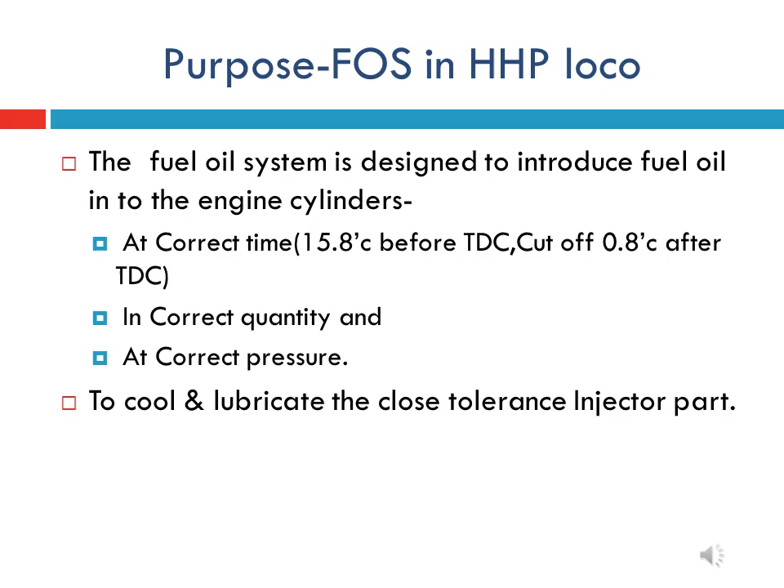Major components of fuel oil system. Fuel oil system of HHP locomotive consists of fuel tank, fuel suction strainer, fuel booster pump, primary fuel oil filter, engine mounted fuel oil filter or secondary fuel oil filter, fuel supply return manifold, and mechanical unit injectors. So let us discuss briefly on these major components one by one in different slides.

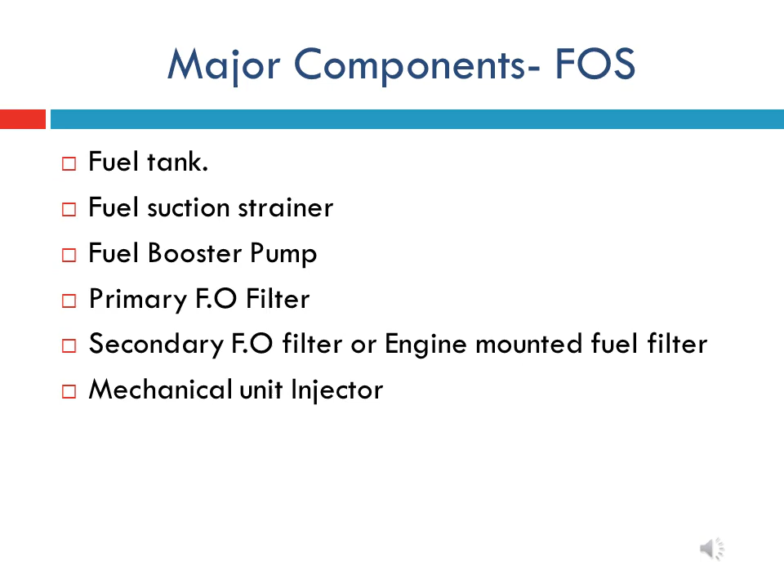Fuel tank of HHP locomotive. In HHP locomotive, the fuel tank is detachable and attached to loco underframe. There are so many varieties of HHP or GM locomotive and each having different fuel tank capacity. Like WDG4 and WDG4D having 6000 liter fuel tank capacity, while passenger locomotive WDP4B and WDP4D having 5000 liter fuel tank capacity.

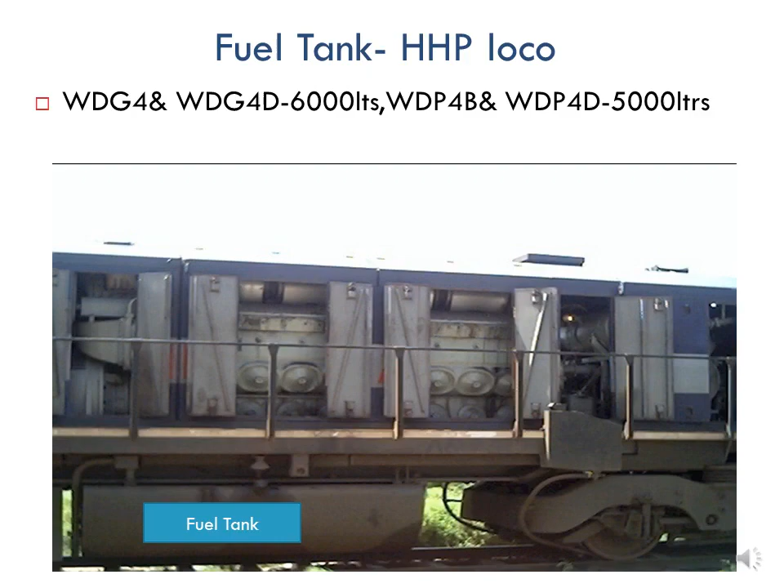Fuel suction strainer. Suction strainer is connected in the system before fuel booster pump and between fuel tank and fuel booster pump. This filters the fuel oil and protects the pump against damage from foreign material. It is usually cleaned in monthly schedule and renewed after 180 days. Rubber O-ring is the important part and normally it is to be replaced while replacing the strainer element after 180 days.

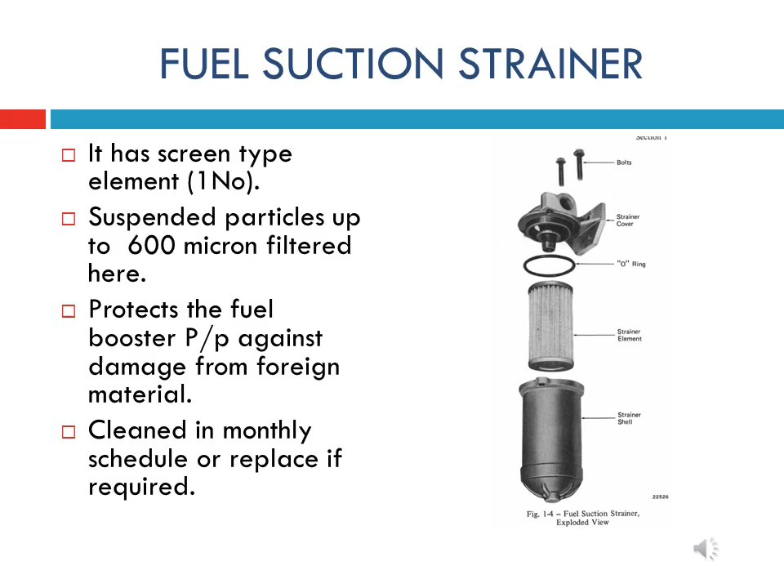Fuel booster pump. Fuel booster pump of HHP locomotive is a gear type positive displacement pump and driven by an electrical AC motor. AC motor gets power from loco battery during system priming, and after starting of engine it gets power from the auxiliary generator. The discharge capacity of pump is 24.6 liter per minute and it is located near front end of the main engine on right side.

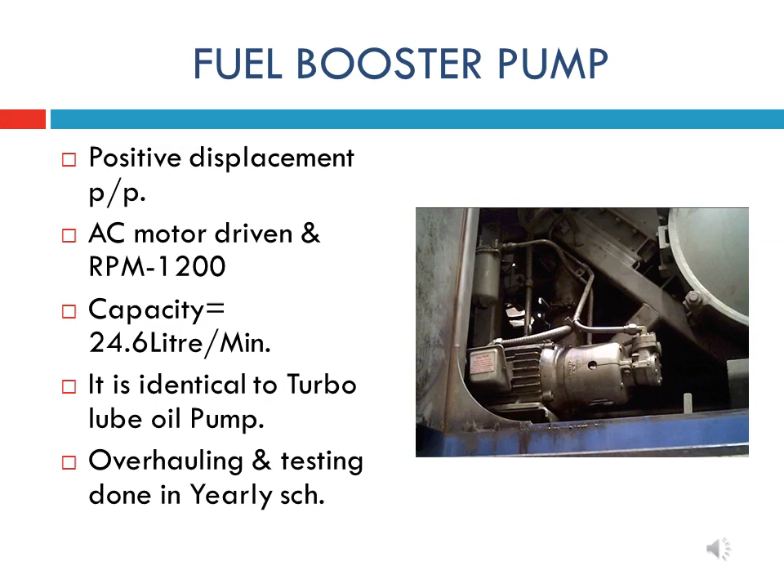Fuel booster pump relocated. Through this slide, I want to say that in most of HHP locomotive, the fuel booster pump is shifted to under gear in between fuel tank and bogies. It has been done by DLW under modification because of frequent failure of inverter of motor. Further, DLW clarified that there was an issue of net positive suction head of pump with motor, so modification has been made.

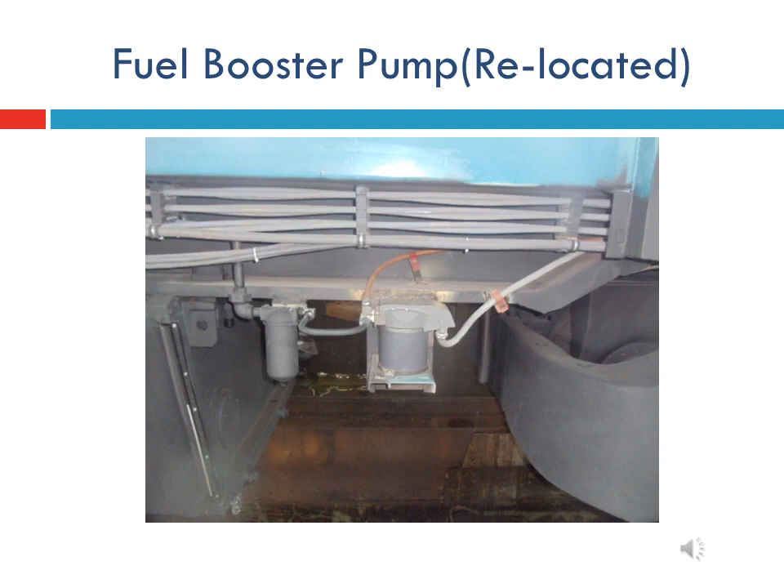Primary fuel oil filter. Primary fuel oil filter is connected in the system between fuel booster pump and secondary filter. It is mounted on accessories rack. It consists of two paper type filter assembly and renewed after every 90 days or on condition basis. Primary fuel oil filter is equipped with bypass valve and gauge set at 30 psi differential pressure. As the filter element becomes plugged, the indicator will show red zone. At this point, the bypass valve will begin to open, allowing the fuel to bypass the primary filter.

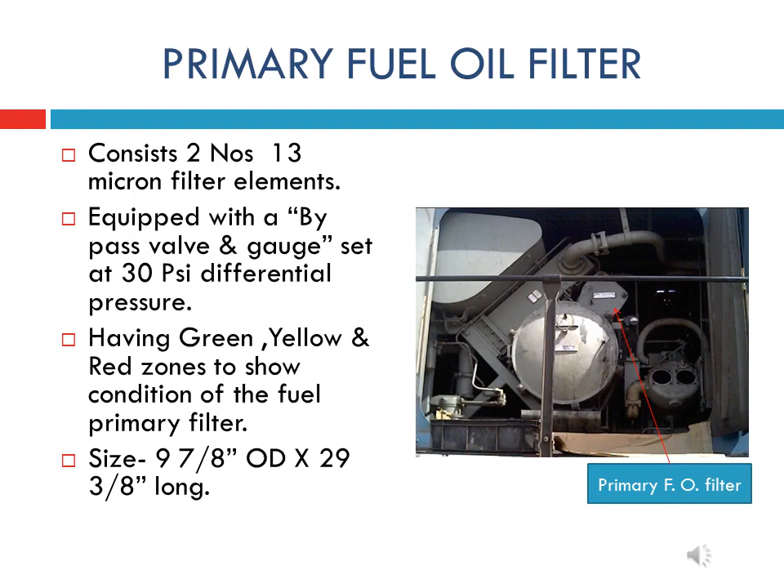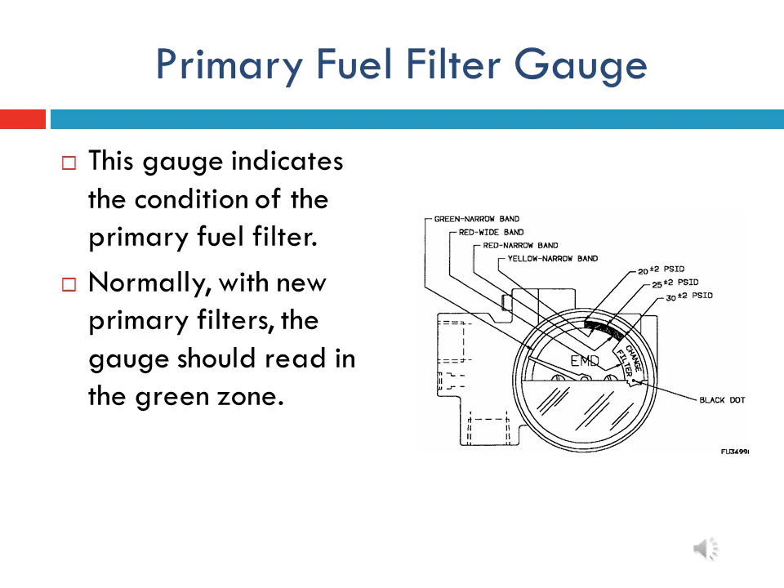Primary fuel filter gauge. In this slide, the gauge fitted on casing of primary fuel filter is shown. It indicates the condition of primary fuel filter cell.

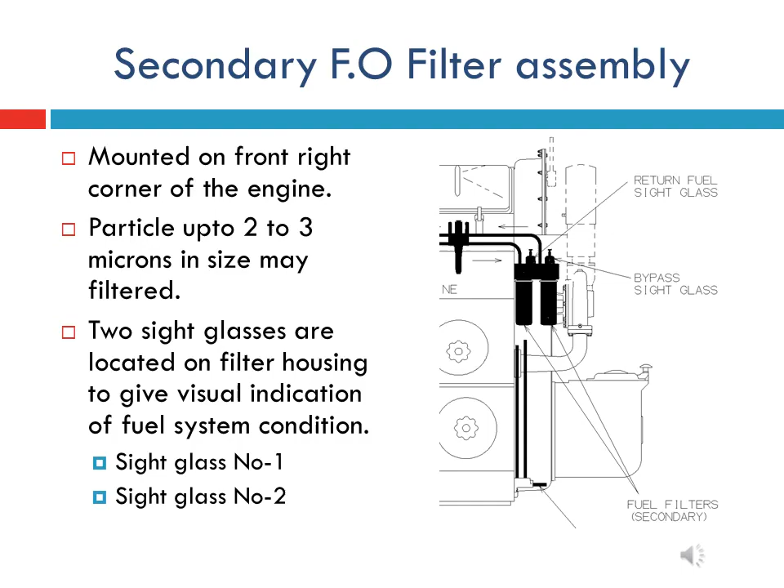Secondary fuel oil filter assembly is mounted on front right corner of the main engine. This filter assembly consists of two filter elements. It is equipped with two sight glasses and two relief valves fitted inside the sight glasses. To understand about the sight glasses, let us move to next slide.

In this slide, let us discuss on sight glass number 1 and its role. Sight glass number 1 is also called as return fuel sight glass, and it is closest to engine body. The excess fuel oil that has not been injected inside the combustion chamber gets collected in sight glass number 1 and returned to fuel tank for recirculation.

In normal running condition of the engine, sight glass number 1 or return fuel sight glass will be full of clean and clear fuel oil without bubble. If air bubble in return fuel sight glass is seen at higher notch and full load, it indicates that insufficient fuel is supplied to unit injector.

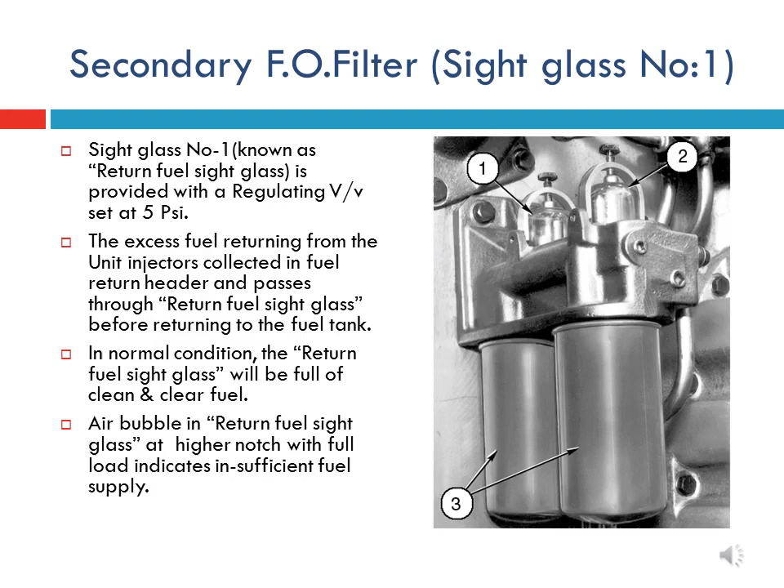In this slide, let us understand the role of sight glass number 2. Sight glass number 2 is also known as bypass sight glass, and it is mounted on the fuel oil filter assembly beside sight glass number 1, as may be seen in the slide. In normal running condition of the engine, the bypass sight glass will be empty.

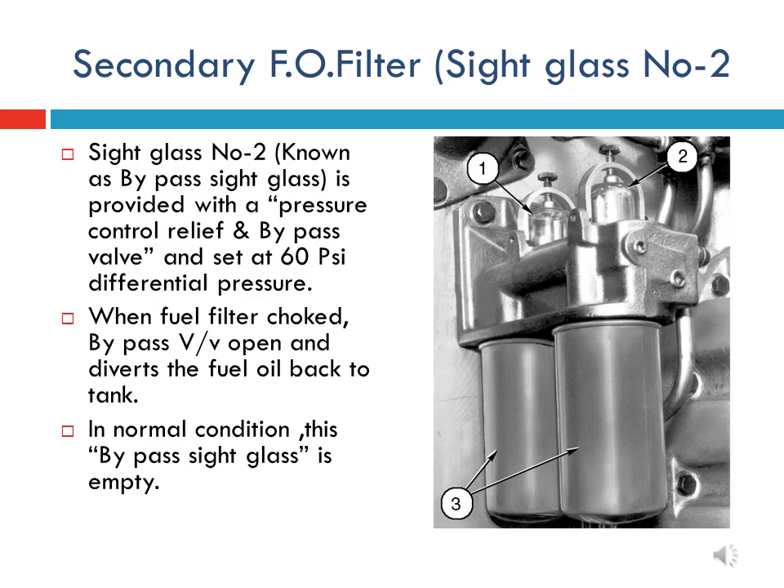If fuel oil has been seen in the sight glass, it indicates that the secondary filter element is clogged. This condition may become serious and cause the engine to shut down from lack of fuel oil.

Mechanical unit injector is one of the most important components of the HHP fuel oil system. It is located and seated in a tapered hole in the center of each cylinder head. The main function of the unit injector is to meter the quantity of fuel oil with the help of the governor and inject the fuel oil into the cylinder during each stroke. The overhauling of this component is done in 3 yearly schedule.

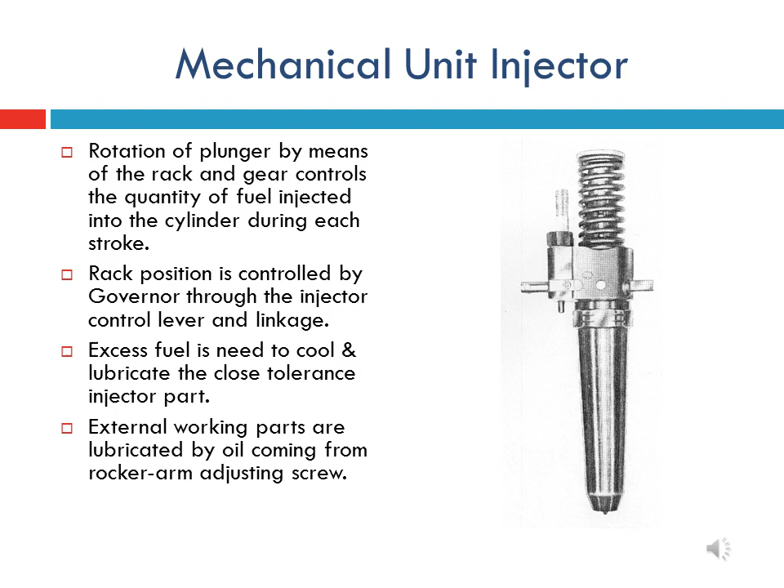Fuel oil system of HHP locomotive. The major components involved in the fuel oil system of HHP locomotives have already been discussed in previous slides. Now let us understand the complete layout of the fuel oil system.

Fuel oil is drawn from the fuel tank through a fuel suction strainer by a motor-driven fuel booster pump. The fuel booster pump discharges fuel oil which flows through the primary fuel filter, then the engine-mounted filter, and then enters the fuel manifold extended along both banks of the main engine. This manifold supplies fuel to all 16 injectors, 8 on the left bank and 8 on the right bank of the main engine.

As we have already discussed in previous slides, the fuel booster pump delivers more fuel oil to the injectors than is injected into the cylinders. Therefore, the excess fuel cools and lubricates the internal parts of the unit injectors and returns to the return fuel sight glass and back to the fuel tank. A relief valve at the inlet to the return sight glass stabilizes the fuel back pressure, thus maintaining a positive supply of fuel for the injectors.

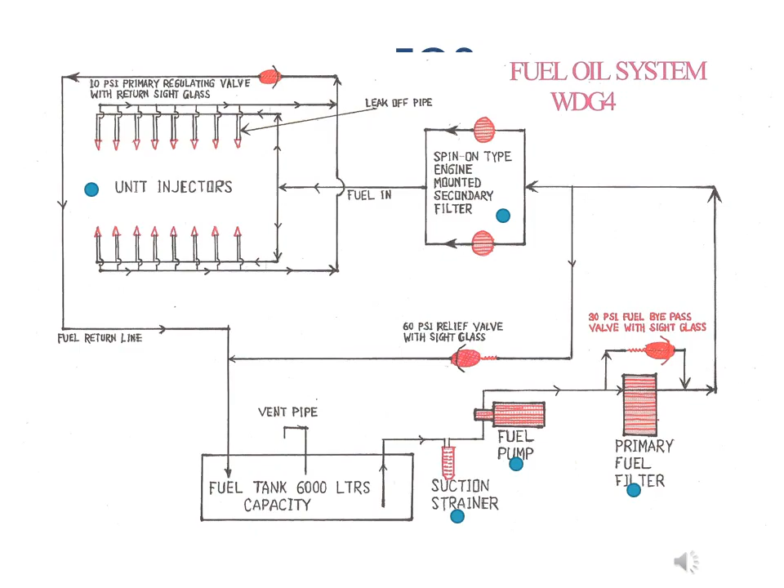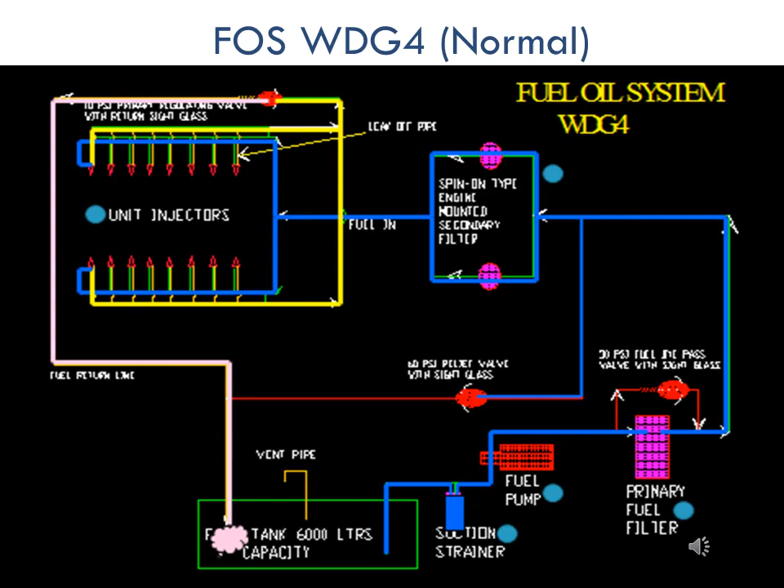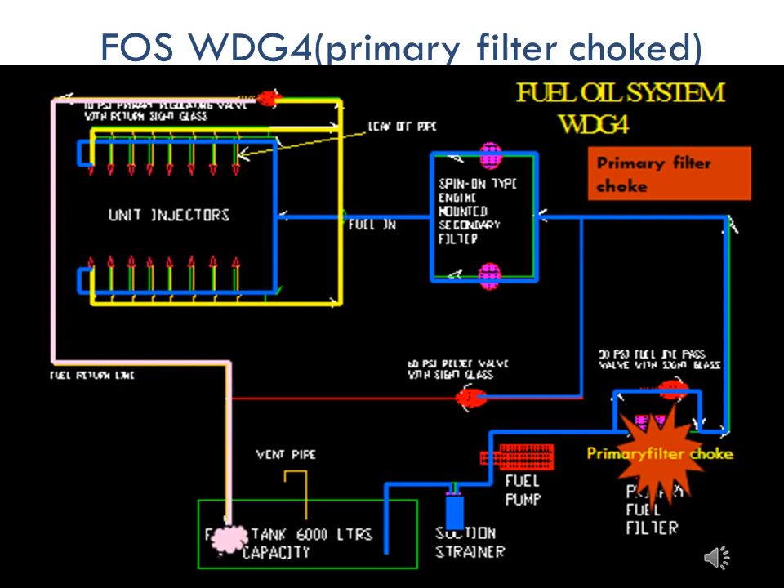In this slide, it can be easily understood the direction of flow of fuel oil in the system when the primary fuel oil filter is choked.

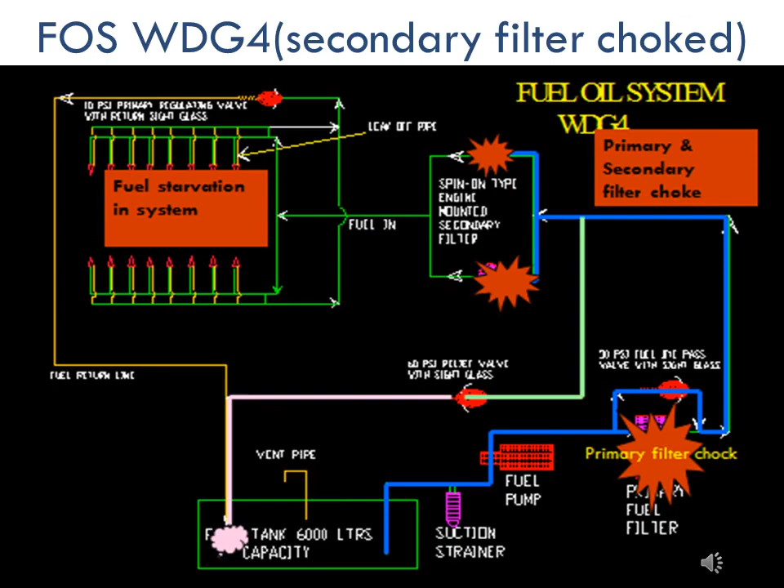For better performance of the fuel oil system and for better health of the engine, we have to drain the condensate water from the fuel tank at intervals.